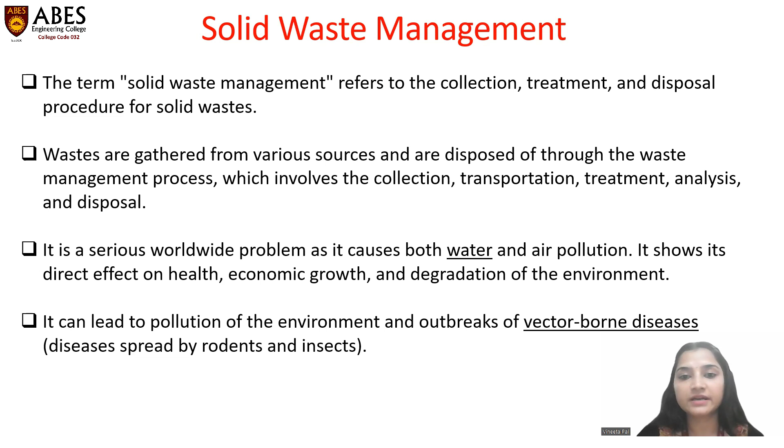Now, after the briefing about solid waste management and its hazardous impact, let us get into more about solid waste. It can be in any form. It can be non-liquid, non-soluble material ranging from municipal garbage to industrial waste that sometimes contains complex or hazardous substances. It includes domestic waste, sanitary waste, commercial waste, institutional waste, catering and market waste also. Biomedical wastes and e-waste are also categorized under solid wastes.

Several tons of garbage are left over on the streets of most developing cities. It acts as a breeding ground for pests that spread diseases. It obstructs the sewers and causes other infrastructure issues.

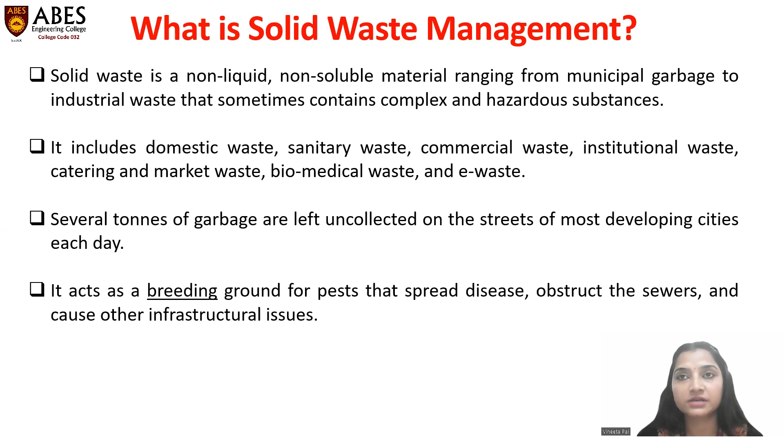If we see the current status of solid waste in our country, India produces around 277.1 million tons of solid waste every year, which is likely to touch 387.8 million tons in 2030, and 543 million tons could be reached by 2050 due to rapid urbanization, population growth, and economic development.

Now, before treating or managing the solid waste, we must understand the various types of solid waste. Solid waste could be categorized into two sections, origin based and content based.

If you see origin based, how these solid wastes originate, they could be in residential areas, commercial areas, institutional areas, biomedical facilities, municipal areas, industrial areas. It could be agricultural waste also, and it could be found in open areas also. These are the origins in which we can find it.

Now, coming to content based, what are the contents that particular solid waste contains? It could be garbage, ashes and residues, combustible and non-combustible. Bulky wastes are also included under solid waste, street waste, dead animals. Construction and demolition waste is one of the major wastes, growing due to the rise in infrastructure of any nation or city. Hazardous waste and sewage waste.

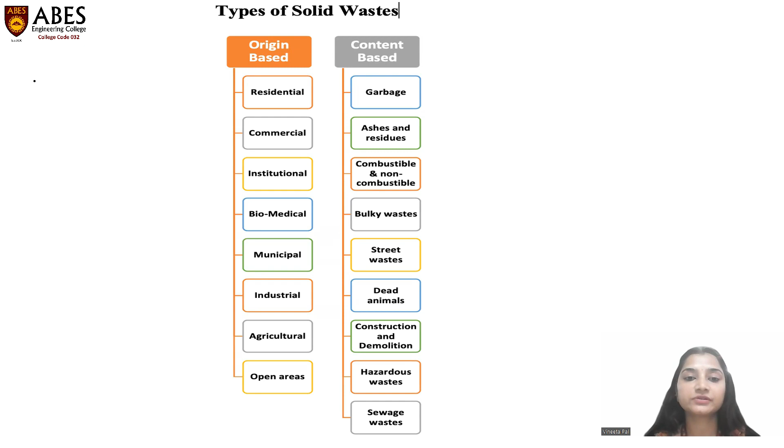So after learning the various categories of solid waste, we can go into detail. If we talk about residential waste, it refers to the waste from dwellings, apartments, etc., and consists of leftover foods, vegetable peels, plastic, glasses, metals, papers, cloth, and yard waste.

If we talk about commercial waste, it could be leftover food, glasses, or metals, and it can be generated from stores, restaurants, markets, hotels, motels, and auto repair shops also. Institutional waste mainly consists of paper, plastic, glasses, which are generated from educational, administrative and public buildings such as schools, offices, prisons, etc.

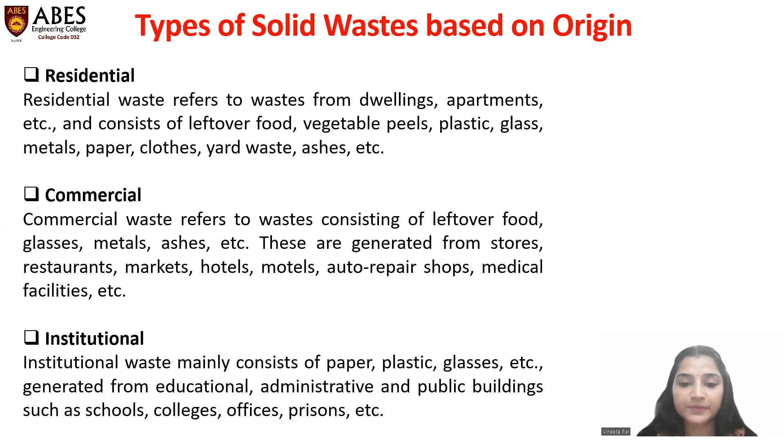If we talk about biomedical waste, it refers to the waste generated from medical facilities such as clinics, hospitals, and pharmacies. They may include human or animal parts, blood, surgical instruments, needles, etc.

Municipal waste includes dust, leafy matter, building debris, treatment plant residual sludges, and they are generated from various municipal activities like construction and demolition, street cleaning, landscaping, etc.

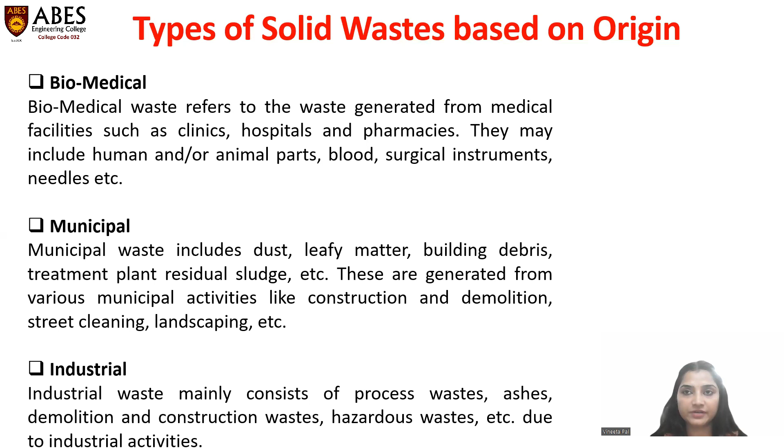Now, if we talk about industrial waste, the various wastes generated from industries like construction industries, chemical industries, and all those chemical activities which are producing waste are categorized under industrial waste.

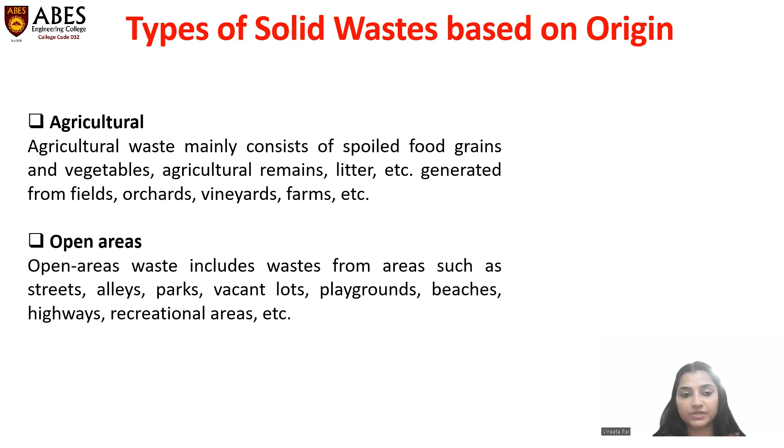Now, since agriculture plays a major role in our country, agricultural waste may be categorized as spoiled food grains, vegetables, agricultural remains, litter, and they are all generated from fields, orchards, vineyards and farms, etc. Open area waste includes waste from areas such as streets, parks, vacant lots, playgrounds, beaches, highways, and recreational areas.

These were the topics under solid waste based on the origin. Now coming to the solid waste based on the composition. The first one is garbage. If we talk about garbage, it refers to the animal and vegetable waste resulting from the handling, sale, storage, preparation, and it may comprise of various organic matter which produces an obnoxious odor and attracts rats and other vermin. It therefore requires special attention in storage, handling, and disposal.

Next category is ashes and residues. These are the substances remaining from the burning of wood, coal, charcoal, etc. And when these are produced in large quantities in small industrial establishments, power generation plants and factories, these are classified as industrial waste. Ashes consist of fine powdery residue, cinders, and clinkers, often mixed with small pieces of metal and glass.

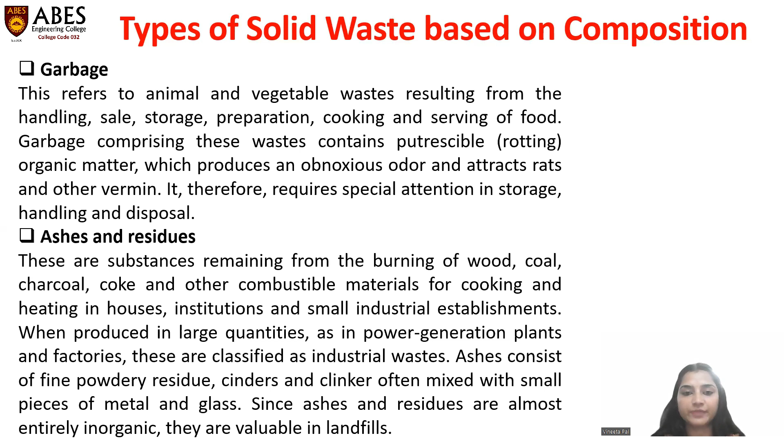Now, combustible and non-combustible wastes. These are the wastes generated from households, institutions, and commercial activities, excluding food waste and other highly putrescible materials. Typically, combustible material consists of paper, cardboard, textiles, rubber, garden trimmings, etc. Non-combustible material consists of such items as glass, crockery, tin, aluminum cans, ferrous and non-ferrous material, and dirt.

Now, if we move towards the bulky waste, these include large household appliances such as refrigerators, washing machines, furniture, crates, vehicle parts, tires, wood, trees, and branches. Since these household wastes cannot be accommodated in normal storage containers, they require a special collection mechanism so that they do not convert into a solid waste problem.

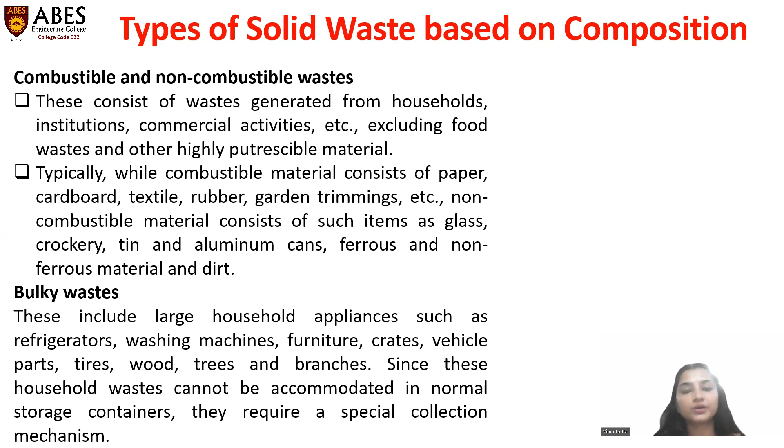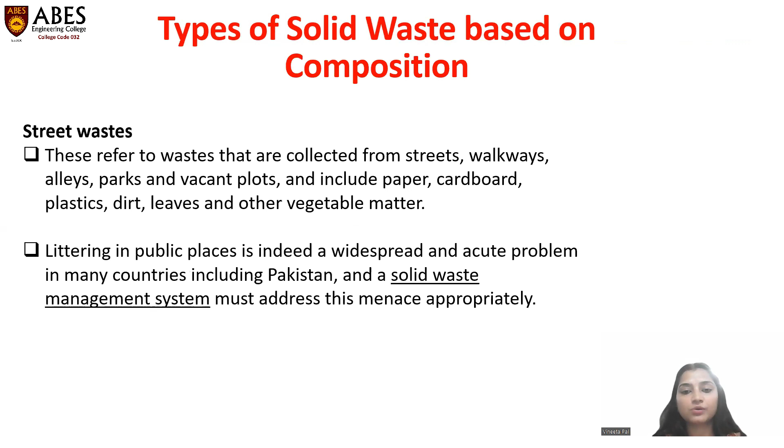Solid waste could be found in streets also, and it is termed as street waste. It is collected from streets, walkways, alleys, parks, and vacant plots. Littering in public places is a widespread and acute problem in many countries, and a solid waste management system must address all these problems appropriately.

Last but not the least, if we talk about dead animals, with regard to municipal waste, dead animals are those that die naturally or are accidentally killed on the road. This category does not include carcasses and animal parts from slaughterhouses, which are regarded as industrial wastes. Dead animals are divided into two parts, large and small. Among the large animals are horses, cows, goats, sheep, pigs, and the small ones could be dogs, cats, rabbits, rats.

The reason for this differentiation is that large animals require special equipment for lifting and handling when they are removed. If not collected promptly, dead animals pose a threat to public health since they attract flies and other vermin as they decay. Their presence in public places is particularly offensive from the aesthetic point as well.

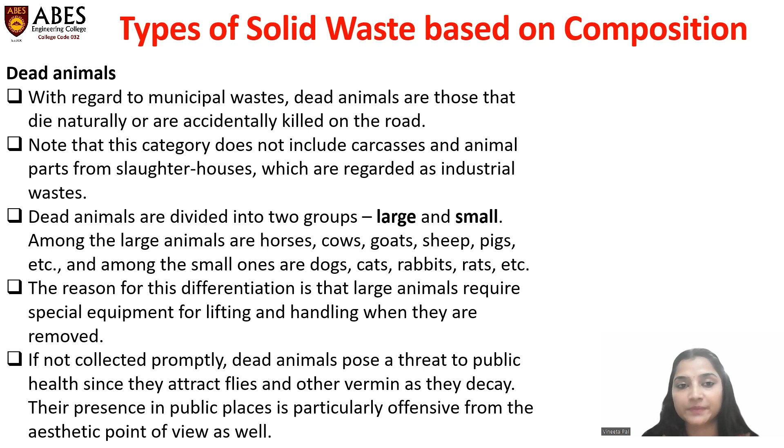Now, after knowing the various types of solid waste, let us talk about how this solid waste could be managed, that is, waste management. Waste management is nothing but the generation, prevention, characterization, monitoring, treatment, handling, reuse, and residual disposal of these wastes. These are the various types of solid wastes, including municipal, residential, institutional, commercial, agricultural, and special household hazardous waste also.

Now, first of all, coming to the collection, transportation, and disposal. There could be three stages in solid waste management we need to take care of. First of all, we need to collect it and then transport it to a particular section. And then, after taking it there, we can dispose of the solid waste by the most adequate method which we can opt for there.

Now, if we talk about collection, the hauled container system is one method and the stationary container system is the second method. The hauled container is emptied at the disposal site and returned to the original location, while the stationary container remains at the point of generation, except when moved to the curb or other location to empty it.

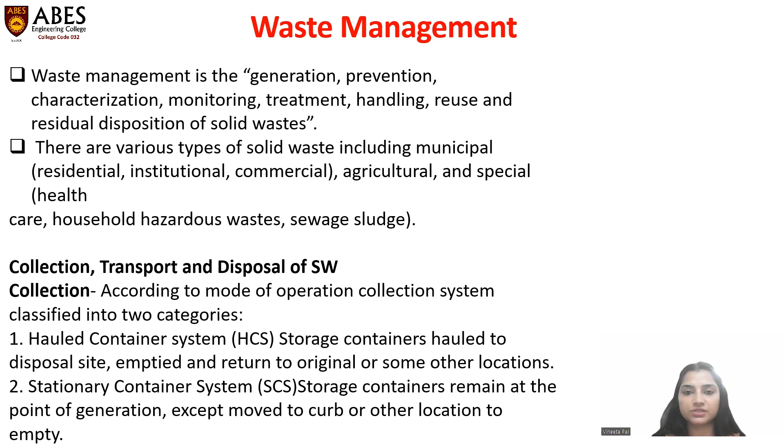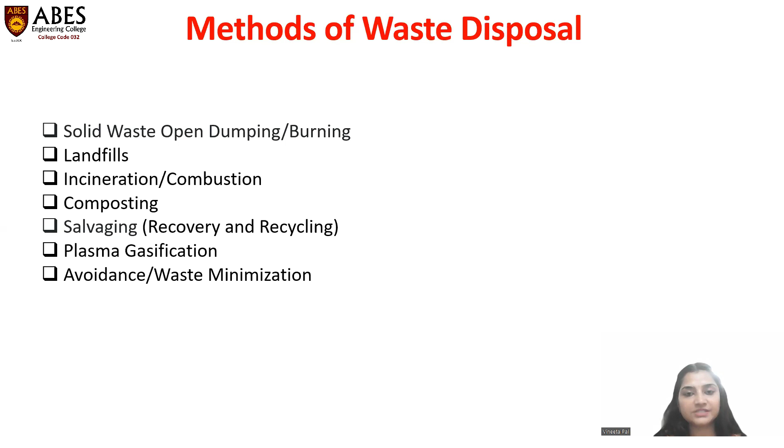Now, these are the methods of waste disposal. Solid waste could be disposed of in open area dumping and burning, landfills, combustion, composting can also be done, salvaging, that is, we need to reuse and recover the waste, then plasma gasification, and finally, one of the best methods to treat waste is to avoid it, or waste minimization.

If we talk about landfills, we can see that landfill is the most commonly used method of waste disposal today, right? This particular process of waste disposal focuses on burying the waste in the land. Landfills are found in all areas. The solid waste sanitary landfill process is simple, clean, and effective. In this procedure, layers are compressed with mechanical equipment and covered with earth, leveled and compacted.

Now, a deep trench of 3 to 5 meters is excavated and microorganisms act on the organic matter and degrade them. In this procedure, the depth is generally limited to 2 meters. Facultative bacteria hydrolyze complex organic matter into simple water-soluble organics.

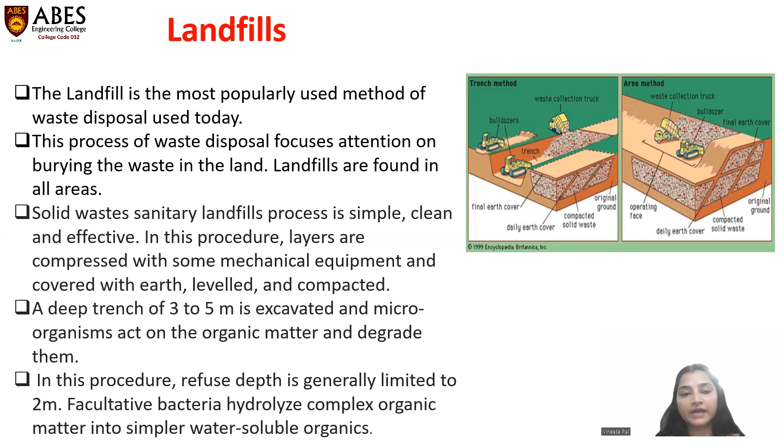Now, if we talk about the second method, that could be combustion. Combustion is a type of disposal method in which municipal solid waste is burnt at high temperatures. This is how you can see it's a boiler, and then it gets converted into residue and gaseous products.

The biggest advantage of this combustion method is that it can reduce the volume of the solid waste to around 20 to 30% of the original volume, which decreases the space they take up and reduces the stress on the landfills. This procedure is also known as thermal treatment, where solid waste materials are converted by combustion into heat, gas, steam, and even ashes.

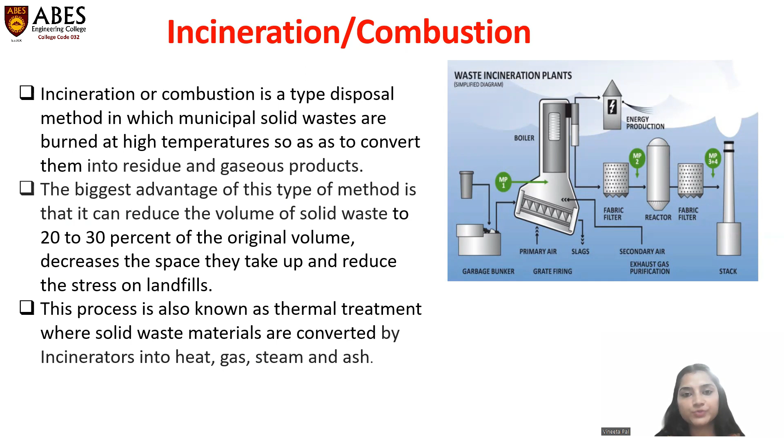Composting is one of the best methods of waste disposal as it turns unsafe organic products into safe compost. But one drawback of this particular method is that it is slow and takes a lot of space.

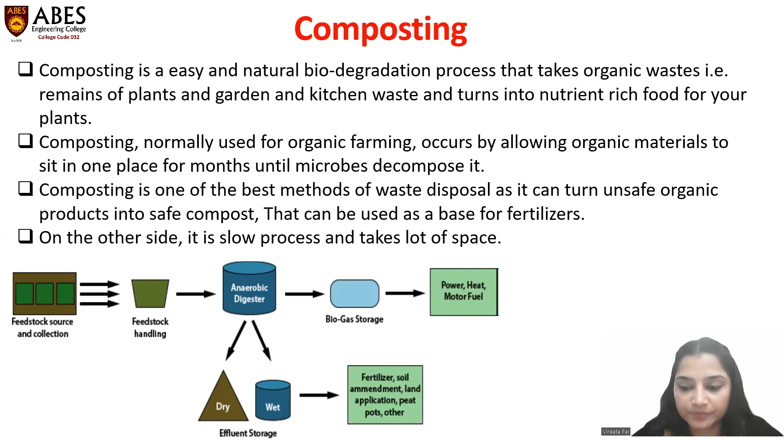Composting could be done by two processes: first of all, open windrow composting, and mechanical. In open windrow, you can see you're composting that particular material in some section and then allowing it to decompose. And the second one, if you talk about the mechanical section, you can use hammers and all within a sufficient amount of time.

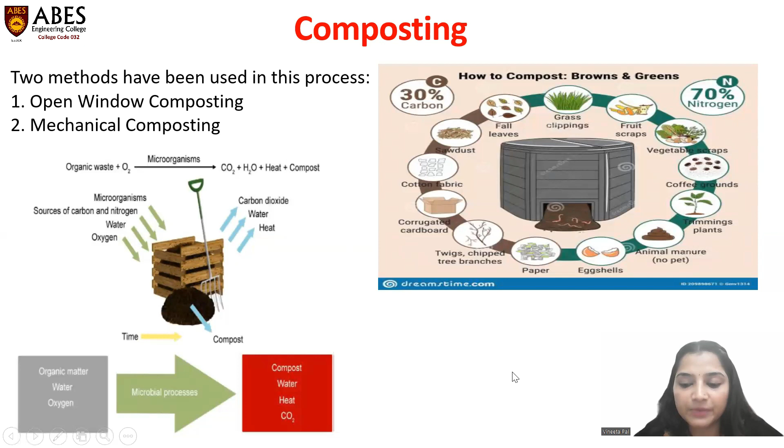Salvaging, that is, we need to recover and recycle. Resource recovery is the process of taking useful discarded items for a specific next use, right? These discarded items are then processed or extracted to recover material and then converted into energy forms like heat energy, electrical energy, or in the form of fuel as well.

Recycling is the process of converting a waste product into a new one, so consumption and use of fresh raw material is reduced. Materials such as metals, glass, rags, certain types of plastics, and so on can be salvaged, recycled, and reused.

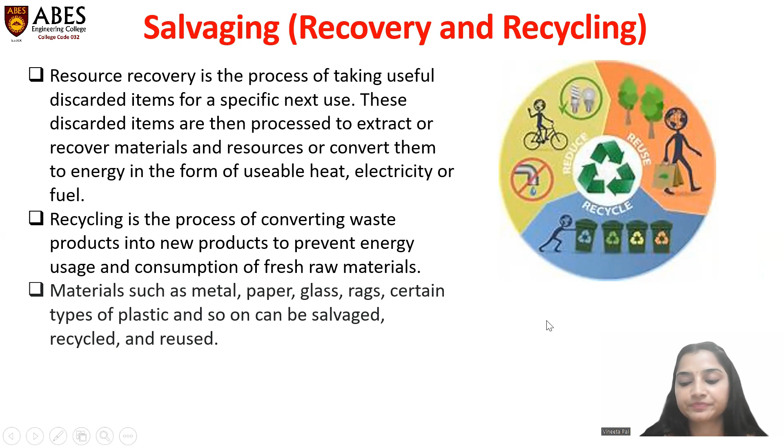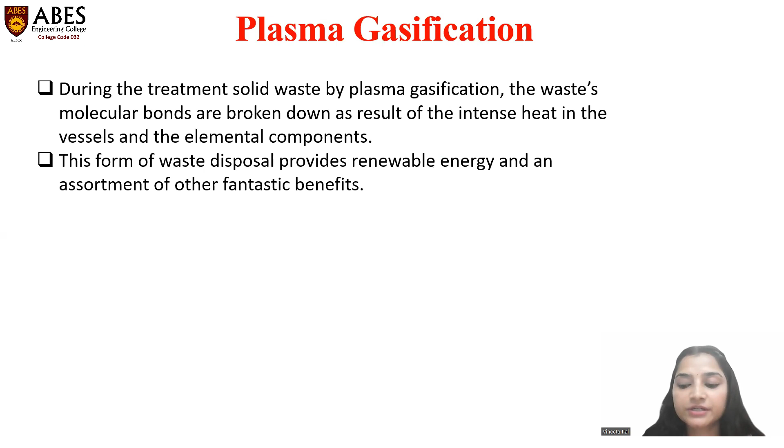Plasma gasification could be new. During this treatment of solid waste by plasma, the waste's molecular bonds are broken down as a result of the intense heat in the vessels, and the elemental components get separated. This form of waste disposal provides renewable energy and an assortment of other fantastic benefits.

Coming to the last but not the least method to avoid solid waste, it could be avoiding or reducing the creation of waste material, waste minimization, thereby reducing the amount of waste which we are going to throw into landfills.

Waste reduction can be done through recycling old materials like jars and bags, repairing broken items instead of buying new ones, avoiding use of disposable products like plastic bags, reusing second-hand items, and buying items that are less designed, right?